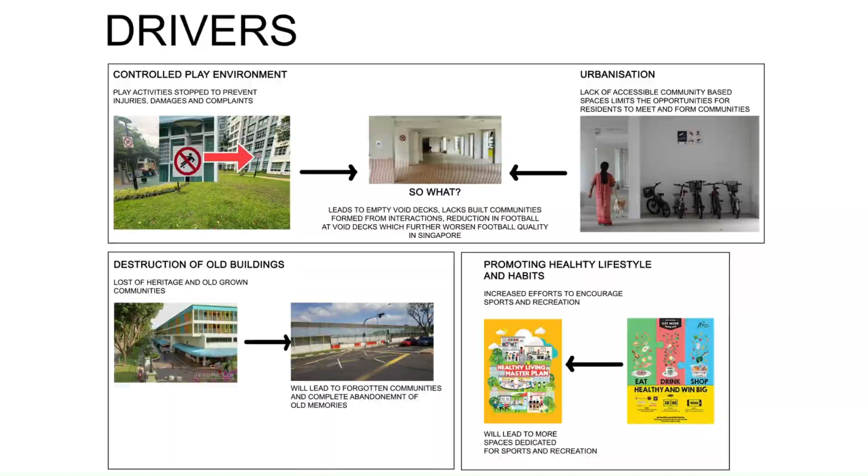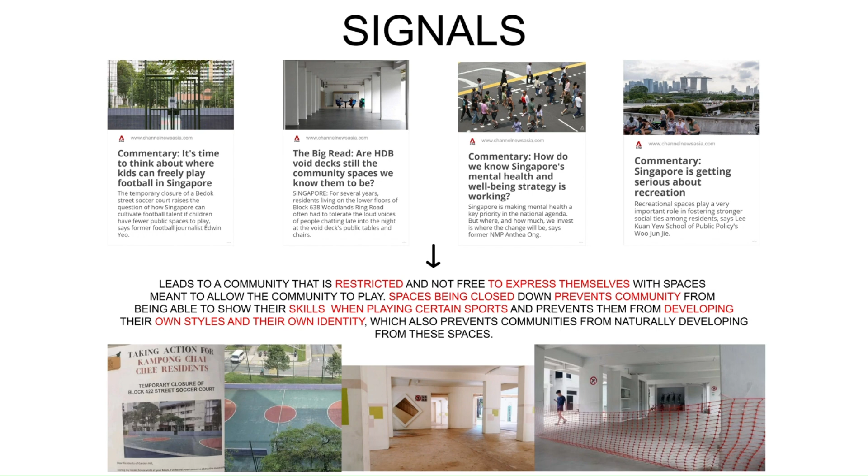For my signals, firstly, from the recent news about the futsal court in Bedok being closed down due to complaints about being noisy and the spaces being dirty, and then HDB void decks being empty, lacking community spaces, and then news about mental health worsening in Singapore. This leads to a community that is very restricted and not free to express themselves within these spaces, and it prevents the community from being able to show their skills playing certain sports, preventing them from developing their own style and identity.

For my project concept, I would like to challenge public sentiments toward the street football culture, providing a space for people to connect through the elements of street football. It exists within the hangar of Old Kallang Airport, forging a new community where street football enthusiasts and curious individuals can experience new ways to play football. It's carved within mundane spaces such as corridors, convenience stores, and eateries to allow for interactions through intimacy of spaces that hopes to encourage users to play together through shared spaces.

So how my project aims to respond to site: firstly, it's nearby the sports hub, so it hopes to draw the same crowd of similar interests as it's both sports related, and it can connect to the link bridge for accessibility. I repurposed the airport hangar due to the huge amount of potential space, and it's more sustainable as I don't need to destroy the current building, and it's nearby the road for transporting goods.

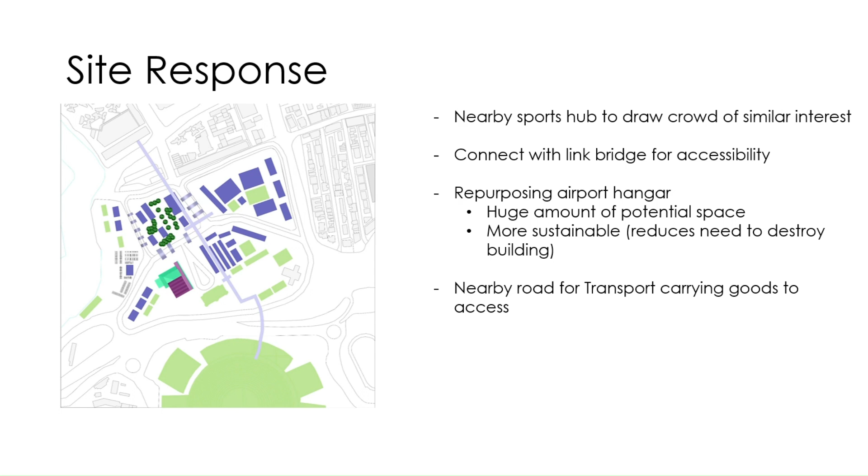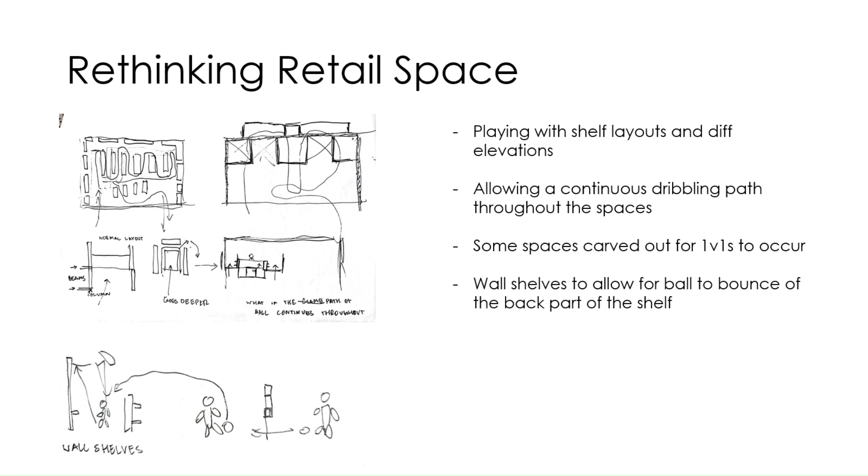So I rethought about the retail space for my project. I play around with shelf layouts with different elevations, allowing for a continuous dribbling path throughout the different spaces in my project. Some spaces are carved out for people to play against each other, and wall shelves allow for the ball to bounce off the back part of the shelf.

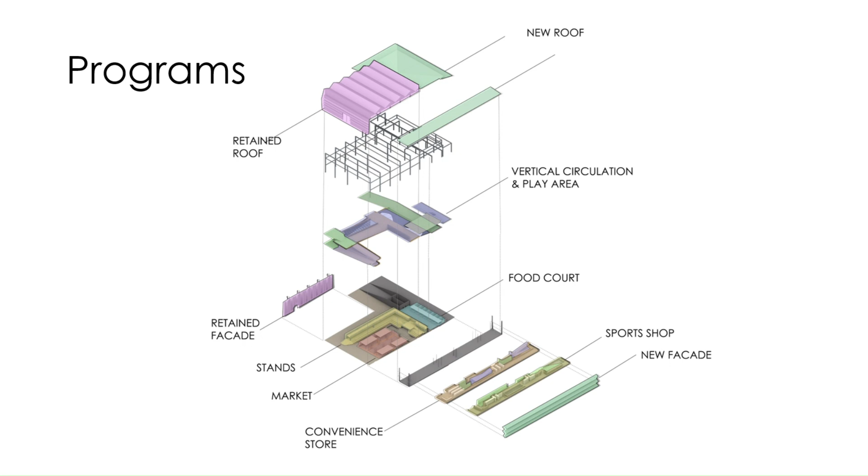These are some of the other concepts that I decided to put into my project. For the different programs: the stands, market, food court, convenience store, sports shop, and a vertical circulation for people to dribble around the spaces, with different play areas located at different parts of the area. I decided to retain the structures, the roof, and the facade.

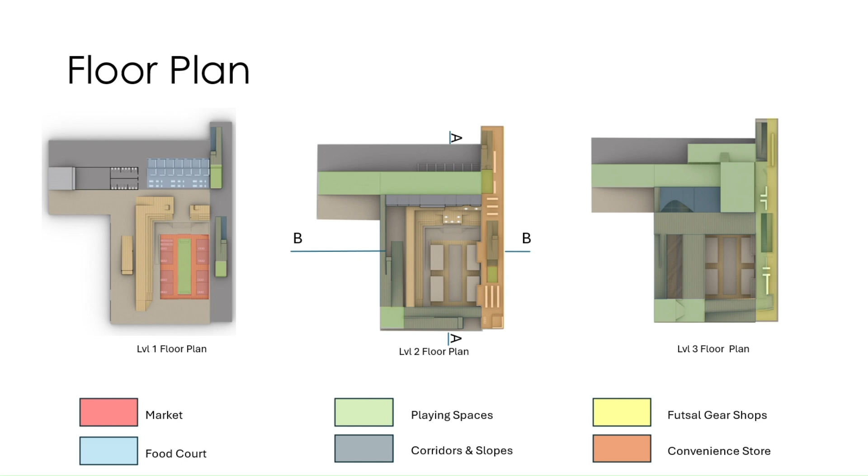Level 1 is where the market and food court are located, and level 2 is the convenience store with corridors and a slope leading to the convenience store and futsal shops, with different playing spaces located at different levels.

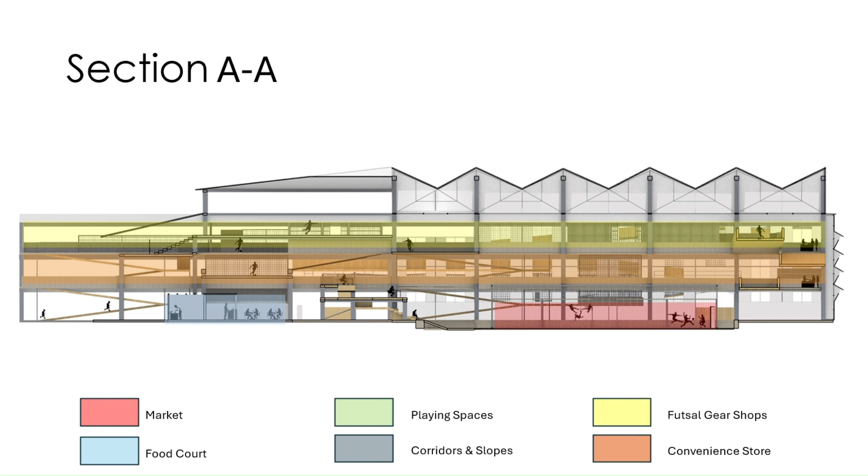This is where the different programs are located at different levels. This is much clearer, where the different playing spaces are carved out at different programs, such as the market, where people shopping at the market can look at the people playing in the middle.

For the convenience store, the playing space is submerged, where the people shopping can look under. And for the futsal gear shop, there are gaps between the walls where the ball can roll to them and they can pass back to the people playing.